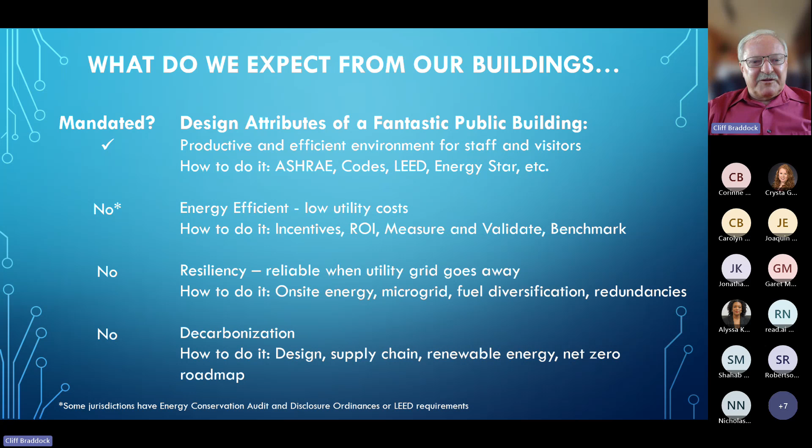All right, so let's take a look at life cycle. Just to be clear, does everybody know what life cycle is? I can still remember a long time ago somebody mentioned, do you know how to do life cycle cost studies? And I said, I don't even know what your question was, much less do I know how to answer it. So that is defined as the cost to the owner of a program over its full life, including the cost for the initial design, construction, subsequent annual costs for operations and maintenance and repairs and refurbishment of the building, and then the eventual demolition and recycling of the materials - life cycle cost.

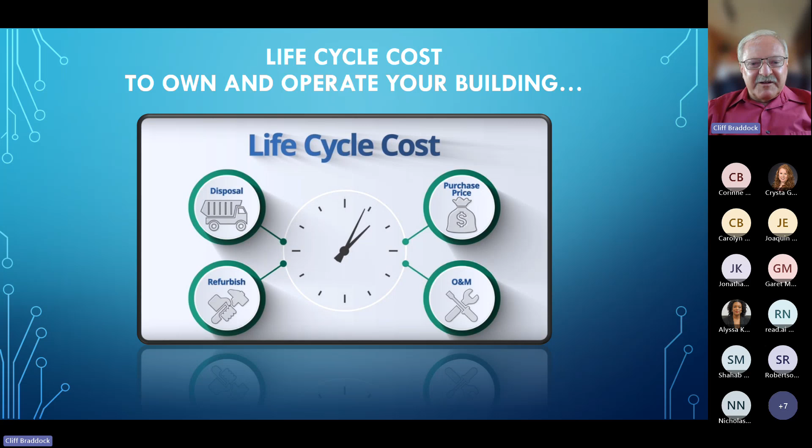So when you look at the life cycle cost of your facility, which area do you think is the most expensive? What areas do you have the most control over? Well, before we answer that about your building, let's look at some other industry of life cycle cost, and this may be helpful whenever you all go out and talk about life cycle cost on your building to other folks.

What does it cost to own and operate an automobile over its life expectancy? If you look at statistics, average cost of a car is 33,000. We put about 15,000 miles a year, we keep it 12 years. So where is the majority of the cost to own and operate that automobile? You have a lot of costs involved - the depreciation, the fuel for it, and then the ongoing maintenance. Sounds a little bit like a building to me.

So when it's all said and done, that initial cost is just a quarter of the overall life cycle cost of this automobile. You will spend $121,000 equivalent cost over the 12-year life of that typical automobile, which works out to 65 cents per mile. Did you all know that? I mean, your car is 65 cents per mile. Kind of what the IRS will allow for your depreciation, for your write-off on using your automobile. And the message here is that the initial cost was just a fraction of the overall life cycle cost.

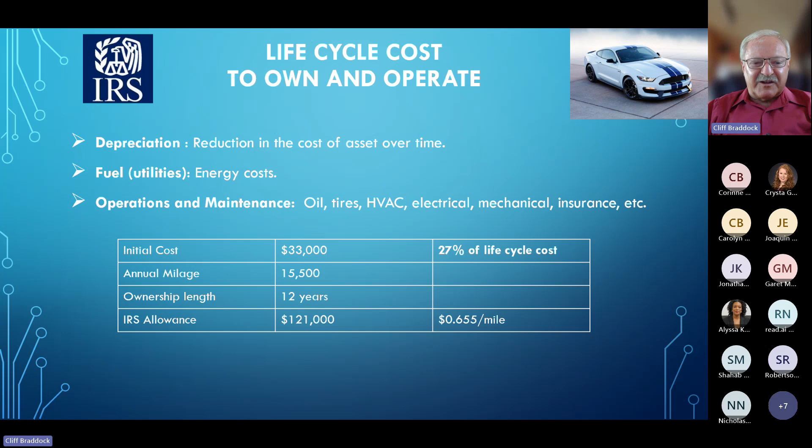So what's that got to do with the building? Guess what? The numbers are not way different. On a building,

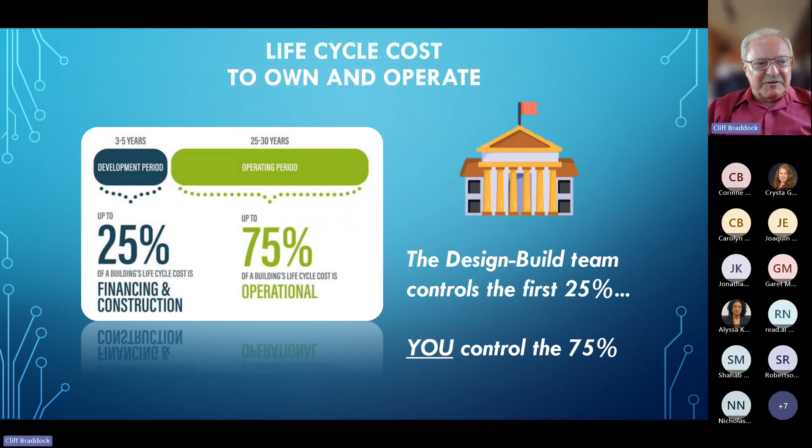there's some variability about this, but generally speaking, a quarter of the cost of the life of that building is embedded in the initial cost. That's the design and construction, and 75% of the life cycle cost of that building occurs over the 25 to 30-year life of that building. So it's not the builder, designer, and contractor that control the majority of the cost. It is you, the facilities operational staff. And that's what we need to hone in on with this webinar, addressing that long-term cost.

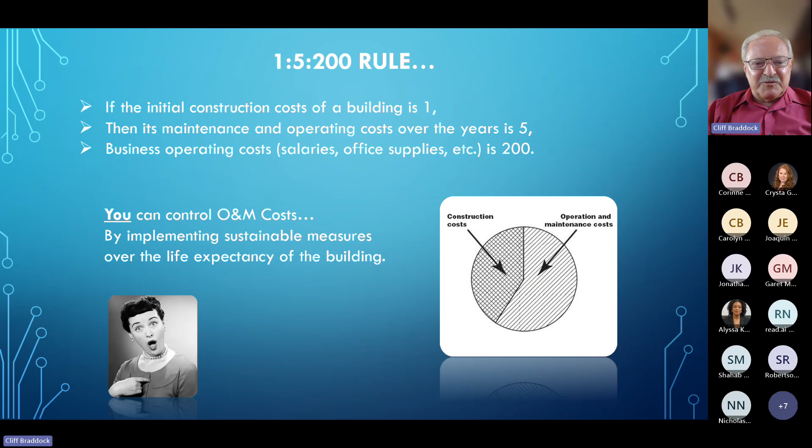So I think y'all are getting the message, but one more slide about those ratios. And I found this kind of interesting. I didn't realize you could go on Wikipedia and look at the 1-5-200 rule. But if the initial cost of a building is a 1, then the O&M cost is a 5. And just to be clear, the largest cost of operating a building is not really what we're discussing in this webinar. It's the salaries of the staff that work there. That is by far the number one cost. You may or may not have control over that. But it's that O&M cost that you do have control over. Yes, you, me. So like the photograph there.

All right, so where do you begin if you're going to take a look at these ongoing costs? I think it may help a little bit with some famous quotes. Some of y'all have probably heard this before, but it never hurts to remind ourselves that you cannot manage what you do not measure. So I have a controls background, and I know some of y'all tuned in here today also have that. You can't control something if you're not measuring it. You know that. So you're kind of shooting in the dark, and you don't really hit the target when you shoot in the dark. So you need to do some measurement.

So what do you want to measure? How about KPIs, key performance indicators? What is important to measure? The energy utilization index, the BTU per square foot, that would be something that's kind of an eye opener. That's a little bit like a scorecard on a test. And then the energy cost index, the dollars per square foot. If you're going to measure resiliency, there's a tier rating by the Uptime Institute that you can use. And there's also metrics reported to the PUC by your utility about the average duration of outages at your facility. And we're going to do a deep dive on decarbonization a little bit later, with more information about how you're going to measure your scope 1, 2, 3 emissions.

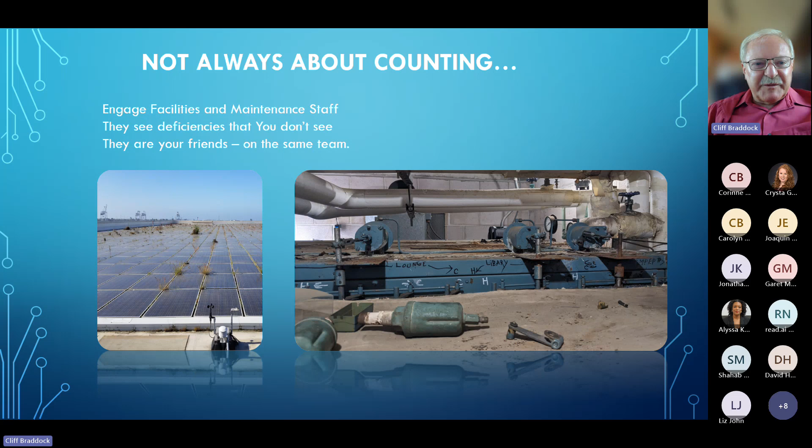So it's not always about counting the KPIs. Sometimes it's just common sense to go look around and let your eyes do some talking.

All right, well let's talk about a cycle now. You're going to see in this webinar that we're going to go all the way to decarbonization, and I'm introducing resiliency and energy efficiency. Have you really connected or realized that all of these are integrated? One feeds into the other.

We don't have enough time here today. I'm not asking us to have a debate or argument over this, but I'm going to suggest that the number one area to focus for any building is energy efficiency. So if you're looking at anything, resiliency, decarbonization, indoor air quality, or whatever your driver is, energy efficiency is paramount. Fortunately, that's a very mature industry, so you know what you need to do. You need to reduce your kilowatt hour usage, reduce your kW demand, try to address hot and cold spots inside the work space, and your goal is to reduce your cost for utilities.

And if you have no idea where your building stands, we need to get a KPI. So where is a good place to get a KPI for the energy efficiency of your building? The good news is your tax dollars have paid the EPA to create the Portfolio Manager program. You just need your own account, a password and an ID, and you're free to use a very valuable software tool for measuring the KPIs of your facility. You can get your EUI, your energy utilization index, your energy cost index, some emission indicators, and other great information from using Portfolio Manager to measure your energy efficiency.

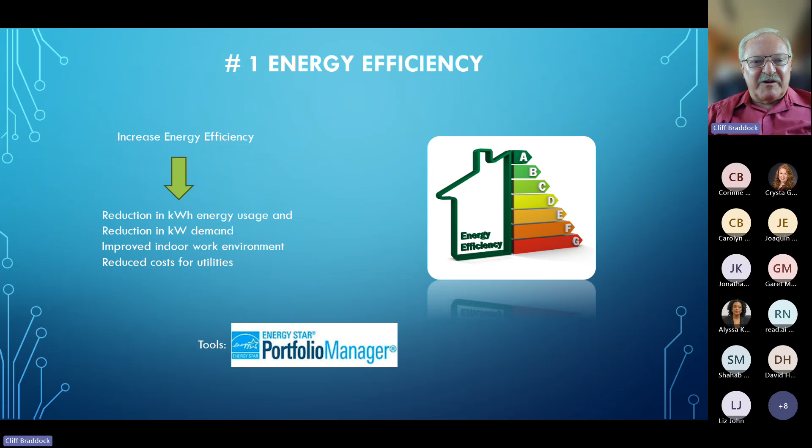So energy efficiency is a great thing because it can reduce your kW and your kilowatt hours. And what does that do for you outside of saving money? Well, if you're headed toward resiliency, how do you get a resilient building? We're working on resilience projects right now that consist of on-site production. You can use gas or propane and solar energy to produce power on site.

There's energy storage with batteries, and with all that properly connected, we can isolate from the grid and continue on with service without the grid.

Now, that solar and that generator and so forth, that stuff is expensive. You could say it has a big dollar amount on a per kW basis, cost per kW for a solar system. So how do you make that cost as low as possible? You want to have the system as small as you can get away with. And how do you get it small? Well, you need to do the number one thing first, which is efficiency. Reduce the kW demand and the energy consumption of your building, and now your cost to do the resiliency measures is going to be less than it would have had been otherwise.

Now then, let me introduce to you something some of y'all may not know about. So how are you going to measure your resiliency? That is, and I'm going to tell you that it's hard to do. It has to do with how much outage do you have every year? What are the disruptions that you have every year? And so how do you get a KPI on that? And I'm willing to share with this audience the outcome of what I'm getting ready to tell you.

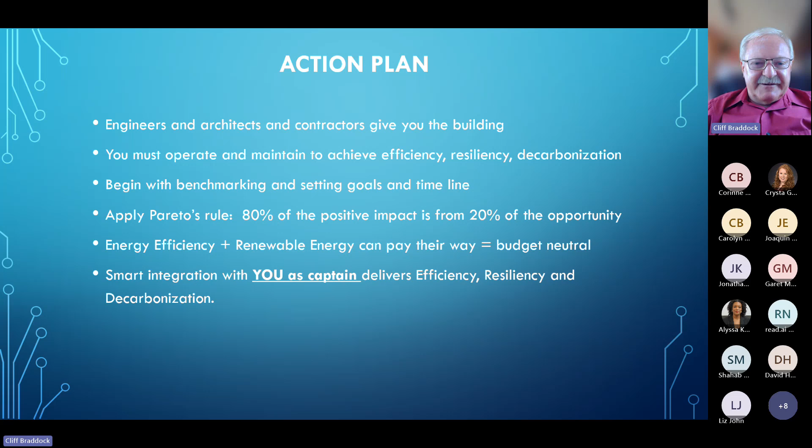So the idea here is smart integration with you as the captain. You can deliver these energy efficiency, resiliency, and decarbonization outcomes. I'm trying to set the pace here for our webinar, and I think that's kind of my messaging. We can do a deep dive on anything and everything, these concepts that we're throwing out there, so we want to continue that discussion. Corinne, I'm done here for right now.

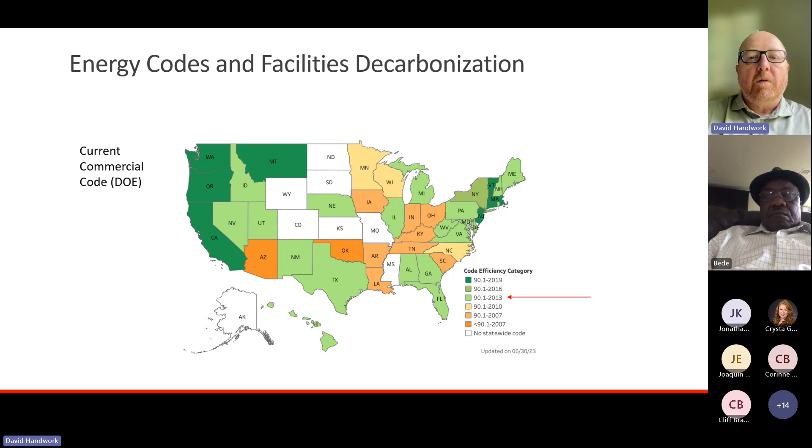When you look at 90.1, the current version is 2013, where you saw on the previous slide that Texas kind of leads the bordering states with the most current version. Texas is parallel with New Mexico, but certainly leads with the most current version. The current published version of 90.1 is the 2022 version, and 2025 will be published shortly.

So when you look at Texas, you've got the most current versions there. I know all states are reviewing the most current versions, 2022 and 2021, mainly because of the grants coming out with the Inflation Reduction Act and the other stimulus bills. They add enforcement of the most current versions, and are also adding incentives for states, municipalities, and other jurisdictions having authority to bring up the most current version.

There will be more dollars coming out to really perpetuate the most current version, so there's not a lag and delay. You saw on those previous slides, some states are more than a decade behind with the most current version, so that's kind of lagging the energy efficiency driven by codes and standards. You see federal agencies really jumping up and taking the most current version, but there are still some giant leaps. This slide may be a little difficult to read.

This was published in 2020, showing a progress report particularly of 90.1, of how to get to net carbon zero emissions. You'll see some dotted lines of advanced measures, rooftop solar offset. They were saying that in order to get there, the line is moving too slow with the 2019 version, and that you're going to have to bring in more advanced measures. That was true with IECC as well.

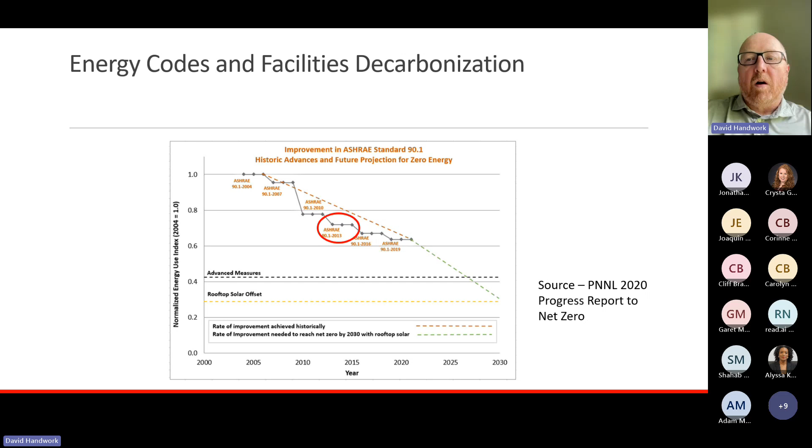So here with Texas, relative to the 2004 version of 90.1, you're only about 70% to net carbon zero based off of a code. IECC had a lot flatter curve, so they have more challenges to get net zero energy efficiency, and you can see the 2018 version there for Texas.

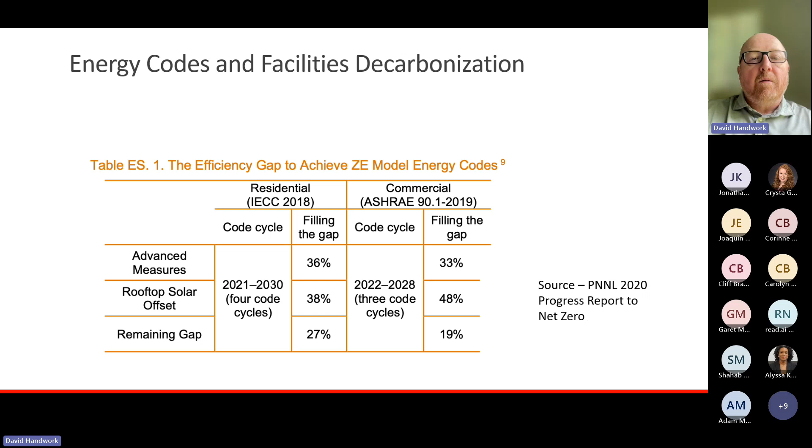Excuse me, I need to back up here, where IECC saw the gap, they changed their publication cycle from a model energy code to a standard. There was a series of challenges to proposals during the adoption process, so they said, let's change how we do our process.

There were multiple stakeholders in the ICC plan to get to carbon zero that said let's get this moved to a different type of review for IECC, so that we can do what they call a glide path to net zero emissions. So both IECC and 90.1 have a plan for the next 3 code cycles, which falls in the early 2030s for both codes to be net zero emission standards and codes.

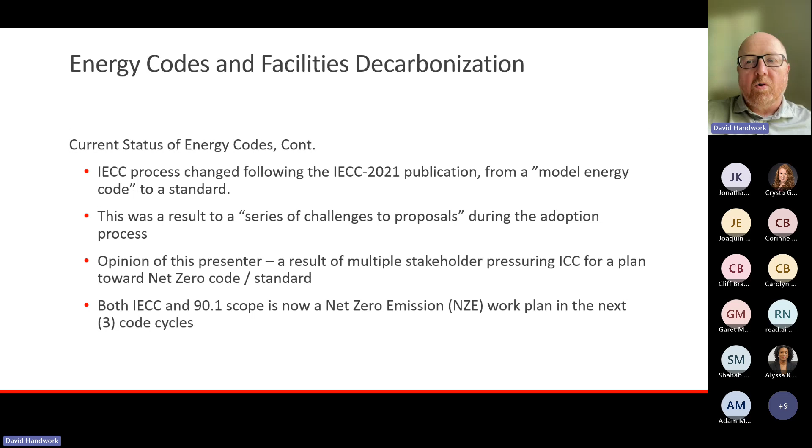Now you'll see the adoption cycle lags, so it may not impact the municipalities and states in their code adoption cycle until the late 2030s, unless you're a public agency and federal funding requires you to be the most current version, then you're going to have to adopt this. So what does that basically mean?

Both standards are going to have advanced measures for all your plug load controls. Right now 90.1 and IECC have occupancy sensors tied to some of that, but you're going to see more elevated management of that and some unregulated scope. You're also going to have advanced envelopes that's going to be prescribed, and there's already in 90.1 an HVAC system performance calculation that's going to be increasing so your holistic system has certain levels of performance that's going to be prescribed.

They're all going to require some level of electrification of your facility systems, getting away from carbon-based fuels like natural gas or propane. You're going to see more heating requirements with electricity or heat pumps. If you've got a chiller system, heat pump chillers have been around for a while, so that may be an option. How do you deal with process heating? That won't be regulated in the short term, but you can see it probably coming.

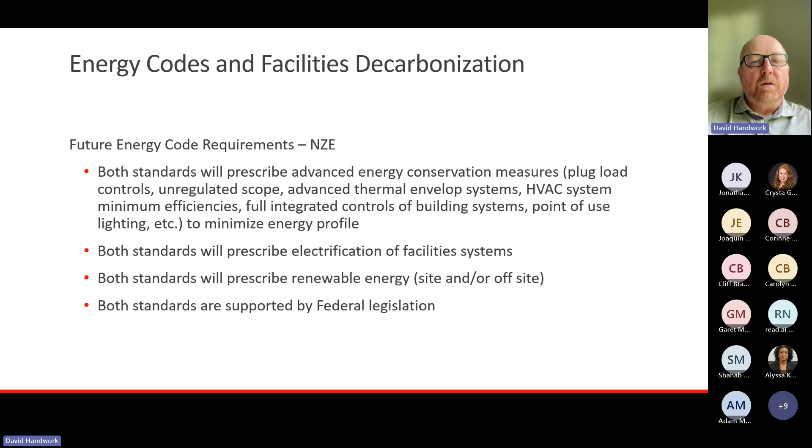The whole purpose is to get net zero emissions, so you're trying to eliminate as much carbon-based energy from your facilities relative to codes as possible. They're already requiring some level of prescribed renewables, and that may be in the current version, so it may not apply to all facilities. But you're going to see, eventually to get to net zero emissions, the prescription of renewables—either site or offsite—be required as part of new construction and major renovation. Most of these standards are supported by federal legislation.

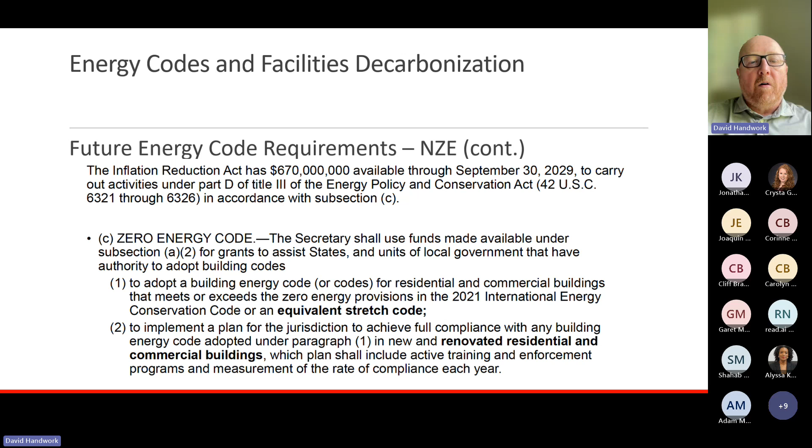Here's some examples. You had the Inflation Reduction Act, which had funding for really having zero energy codes. I won't go through all the details—I'm just showing this as an example. This was part of the IRA. So this is what they're trying to get to, at least in 90.1.

As you go through the code cycle to the 2031 version, you're going to get to where your energy efficiency is 0.35 relative to the 2004 version, and the renewable offsets at the bottom of the graph will step up as you go forward in the code cycle to get to net zero emission. I think I have a slide showing where we're at with ASHRAE in Texas. You can see, even coming up to the most current code cycle in 2031, there's a lot of steps that have to happen. Even getting to the most current version is a lot of steps.

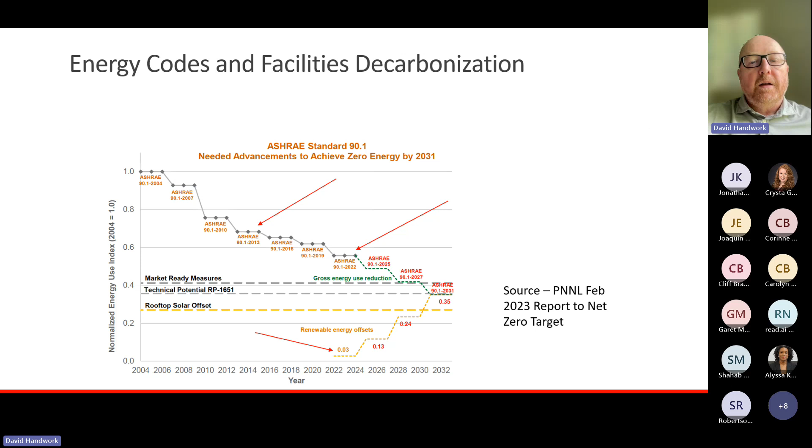Now you have 0.03 in renewable energy offsets, and that's going to step up to 0.35. So you can imagine what that's going to do for costs. But here's the kind of trick question: will Texas, and will municipalities within Texas, adopt this code? There's already pushback right now because of certain factors—some of it's political, some of it is driven more by the fact that construction costs are going to go up. That can be called political, but it's also definitely true when you're dealing with certain construction types, especially multifamily housing, where it increases costs.

You're seeing states like North Carolina put a moratorium on freezing the IECC, because of the multifamily housing costs they found in their cost analysis. There's also Colorado, which is going the other way and saying they're going to mandate energy performance, despite the criticism. In the state of Texas, Governor Abbott, in the last year, vetoed part of the energy efficiency bill. There's a lot of reasons for that, but the point is there's not full adoption across all states of these bills. Here are some more examples—I'm just rolling through real quick.

Very interesting—St. Louis had a residential energy code update, but the state of Missouri overrode that and said no, you're not going to do that.

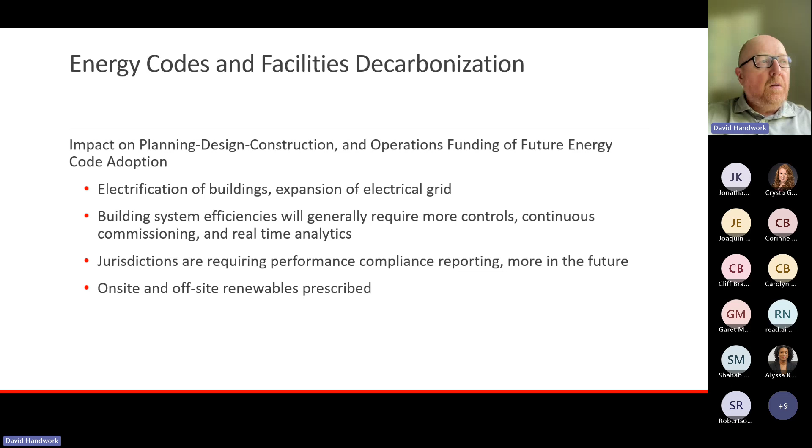And then we're going to figure out how to deal with on-site and off-site renewables. Texas has land available, but other states aren't going to have that luxury. So how do you deal with that?

Other impacts on the design: first, construction costs. I was director of planning, design, and construction, so I have some basis for this, but I'm just guesstimating that we're probably going to see a 10 to 20% increase in first construction costs with the adoption of the most aggressive codes in 2031.

Total cost of ownership may or may not increase when you look at energy savings and other factors, but that remains to be seen. Operating costs should decrease, but again, I've already talked about the technicians issue. Compliance failures could result in penalties and fines. Public universities may have federal dollars tied to research, or even Pell Grants restricted, reduced, or eliminated if they're not meeting some of these codes in the future.

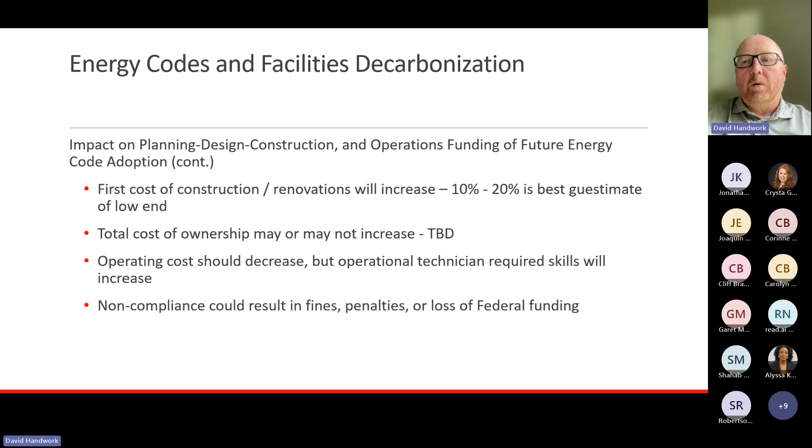So what do we need to do? We're already decarbonizing new buildings via code, but we've got existing buildings—how do we deal with that? Going forward, you may not be doing a major renovation where codes and standards apply, but there's still a pathway to reach decarbonization, whether prescriptively via code mandates or voluntarily.

For existing buildings, the actions we're taking are virtually non-existent, because it's all driven by economics, or by an entity committed to decarbonizing their facilities. It's very difficult because it's a slow process. If you look at the CBECS database, most buildings were constructed prior to 2010, with very limited DDC controls or other features, which makes it very difficult to decarbonize.

We've all probably heard the statistic that buildings in the United States, and even the world, consume about 40% of energy—I pulled that data from the CBECS database. But there are also common barriers: general capital funding, how do we replace fossil fuel systems, and the fact that we just don't have the technology leap yet to really get where we need to go.

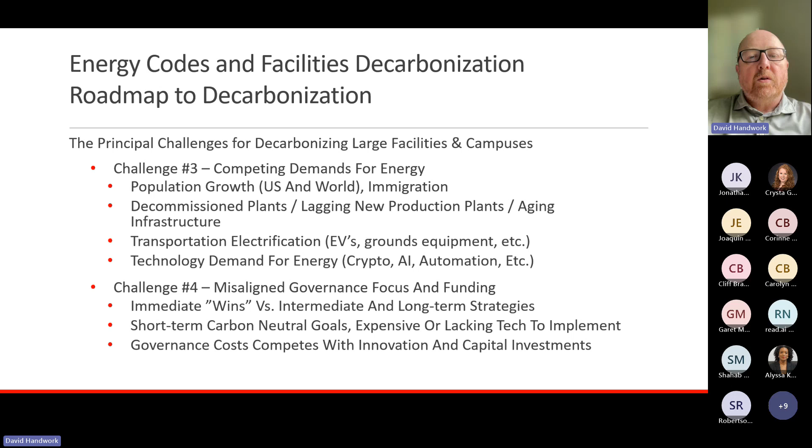We also have misaligned governance funding. Politicians like to go for quick wins and aren't rewarded for long-term vision, because if they pursue that, they're often voted out before it comes to fruition. Some of that needs to change—we need more long-term goals instead of short-term wins.

So how do we do this for existing facilities? It's pretty easy: you just need to go do aggressive energy optimization right now. That usually has a very quick ROI. Some activities aren't even tied to occupant behavior—with technologies available today, you can implement retrofits on existing buildings and get an ROI of 24 months or less in some cases. You need to look at your occupancy, because a lot of times the best energy conservation is simply turning things off.

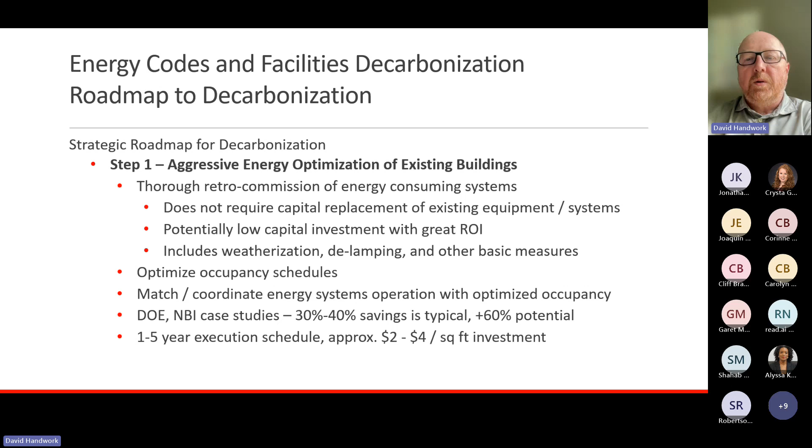If there's nobody in the building and there's no reason to run your systems for data centers or other types of requirements, turn the systems off. You match and coordinate these systems operations with optimized occupancy of the buildings. DOE and the New Buildings Institute had studies showing there's potentially 30 to 40% savings in these type of step one scenarios.

So it's quick payback, usually investment $2 to $4 a square foot. Step two, once you get past that, when we came out of COVID, this is more related to commercial real estate and even higher education where students are doing more remote learning. Our spatialization is much, much lower. I've seen numbers in other parts of the country where commercial real estate utilization is down as much as 50%. In Texas it probably varies - in North Texas, utilization is pretty high because there's high demand.

But even with high demand and high utilization, you have to have a top-down type of approach where you're committed, because everybody wants to own their space, and we tend to use more space than what we really need. So you've got to really deactivate these unused spaces and put safety backstops in there so you don't have unconditioned space that creates other challenges and other liabilities.

And then you expand those energy optimizations with optimized spatialization. This is a very hard nut to crack because of the ownership of space and giving that up, and having full control of unoccupied spaces. But payback is usually pretty quick, and cost is pretty low - 25 cents to 50 cents a square foot. If you do it with step one, it makes the ROI come down a lot faster.

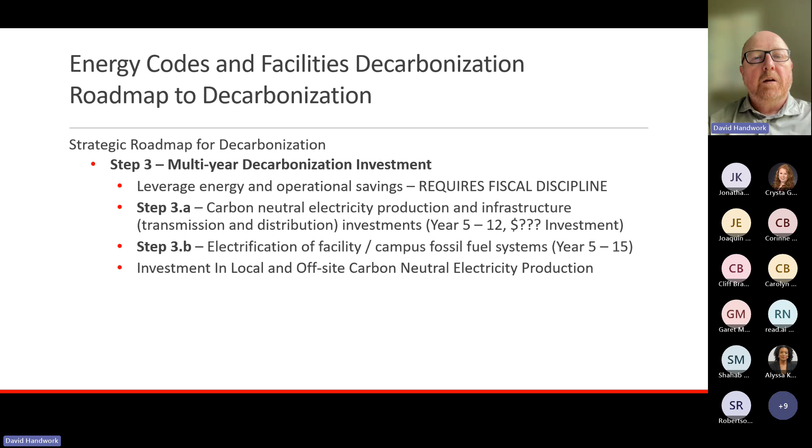This may take 10 years to implement, but you have to be disciplined and follow these plans. Once you get through, say, 5 to 15 years of steps 1, 2, and 3, then you can start looking into the future and technologies that are coming forward. You really want to reduce with those steps 1, 2, and 3 to get your EUI, your energy use index, down to, on a basic commercial facility, less than 30,000 BTUs per square foot a year.

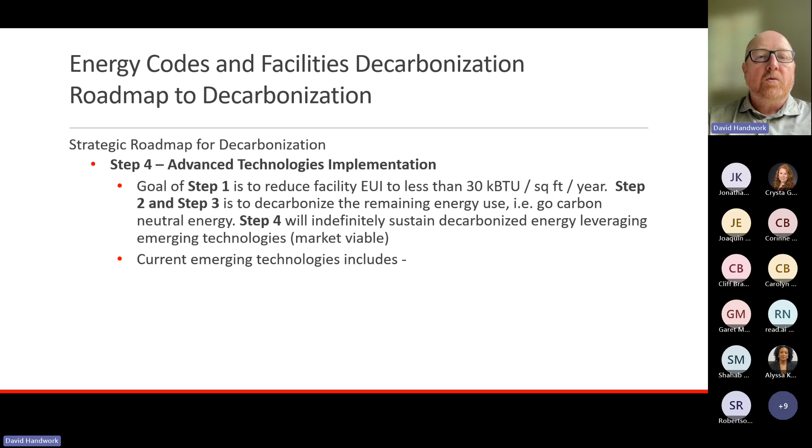Then you can start putting these other factors in, and it makes sense to right-size your renewables. I agree with the prior speaker that solar now has a cost justification. If you own your land, it's easier; if you have to go get more land, it may get more difficult. But you can get into newer technologies that are available today and will advance in the future - they're going to include a lot of these different types on the edge and also market-available.

As we get into energy storage, it's going to make renewables more viable. The thing I'm watching right now is long duration storage, and I think that's going to advance in the next 5 years - we're going to see a lot of that, and a lot of these other really interesting technologies.

Continuous air purification is already in some markets - why ventilate a building if you can purify the air and make the IAQ better than bringing in outside air? I'm not saying eliminate outside air, I'm just saying minimize it so that you can get good IAQ.

And all these different artificial intelligence tools will be a game changer, but it's not yet. It can do generative AI, but when it can start doing mathematical functions, then we can start applying that to energy optimization and planning.

Things that are like super insulation, OLED film lighting, where your whole ceiling is a light. OLEDs have been around, they're on our phones. But there's a lot of testing in the emerging market. They're very low power, high efficacy.

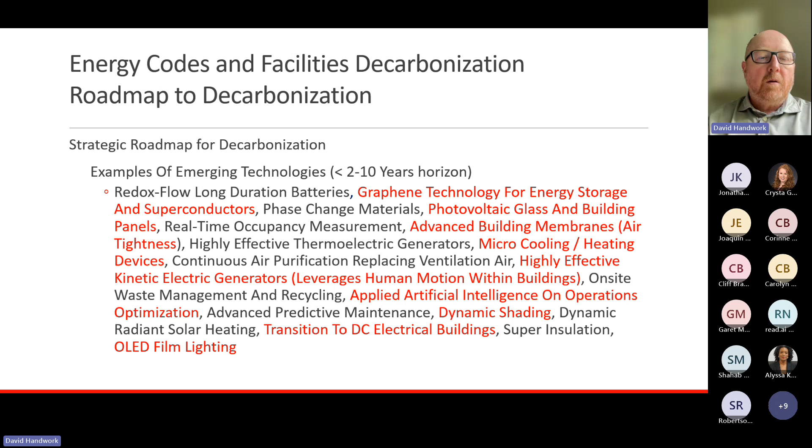The things like that are going to change when we can get to net zero emissions pretty quickly. Will we get it as an economy by 2035, 2040? I don't think we will. Do we need to be totally carbon neutral? That depends. But we need to work and strive to be a net zero emission economy, but also a net energy independent economy, so we can lead the world with decarbonization and energy independence, with less dependence in the global market relative to efficiency and decarbonization.

So with that, I'm going to turn it back to you, Corinne.

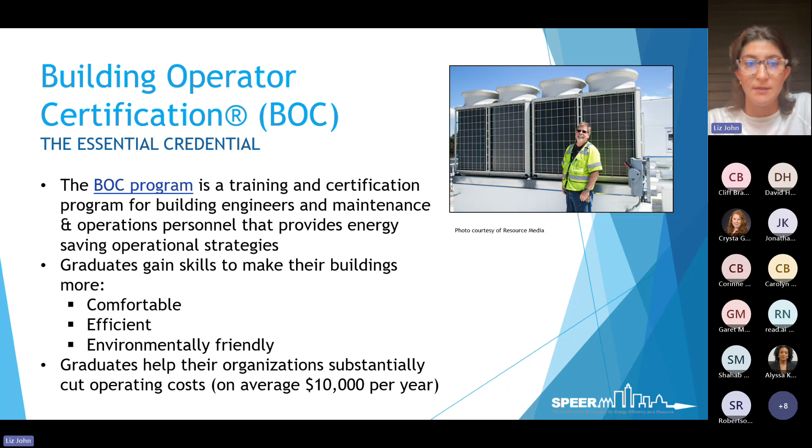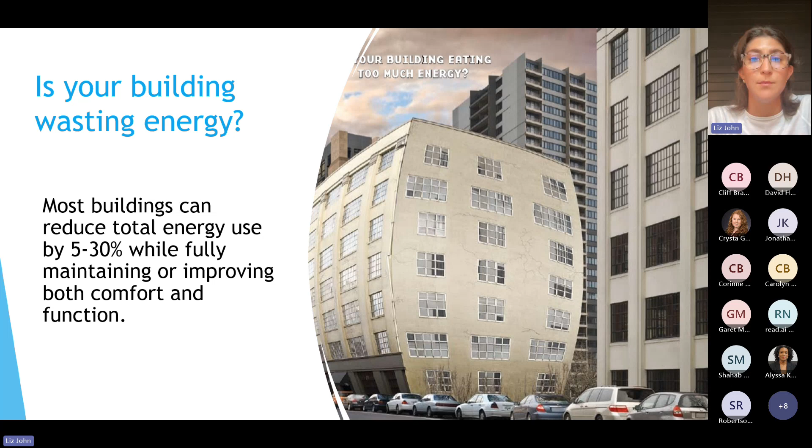So how do you know if your building is running efficiently? Many have room for improvement, and energy problems can lead to comfort problems. Many buildings can reduce energy use by 5 to 30% while improving comfort in these buildings.

So let's talk about the energy savings for BOC. BOC is one of the only training programs with third-party evaluators. Sometimes facility departments are seen as a resource center for using energy and staff, so anything we can do to save money and energy going into that department is largely helpful.

Up to 12 to 13 states accept energy savings from the BOC, and all of the savings reports are on the National BOC website. They also include water and gas as well.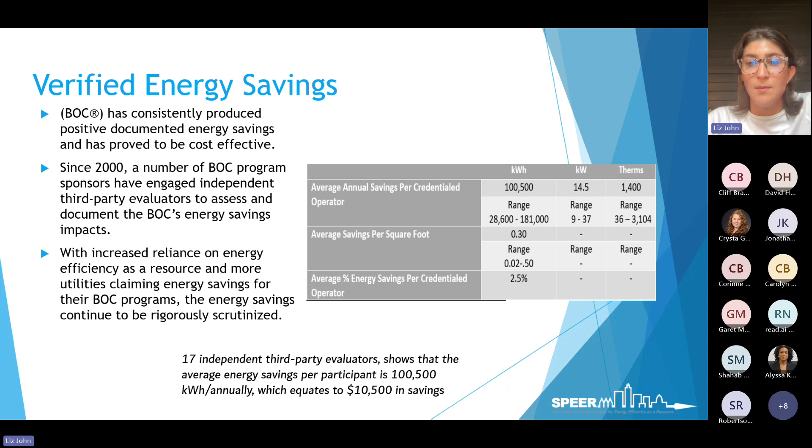Let's touch on the benefits beyond just energy and money savings. These facility managers increase job safety with the knowledge that they gain. They will improve productivity, equipment lifespan, and building performance. You improve your indoor air quality, occupant health, and it reduces turnover. You have well-trained technician staff and operators who can make decisions quickly, and they feel more empowered to do so.

Fundamentals is for folks who are maybe interested in getting into building management and don't have a base level of knowledge. It covers building system basics, the fundamentals of indoor environmental quality, and you don't have to have any prerequisites to enter into that. Level 1, we do encourage students to have either 2 years of experience under their belt or have taken some education prior to this. It's a little bit more in depth than fundamentals.

They touch on HVAC controls, a full building scope. Students take what they learn in class and apply it to a hands-on project in their facilities, really just to engage them and make sure that they are able to put into action what they are learning in the classroom.

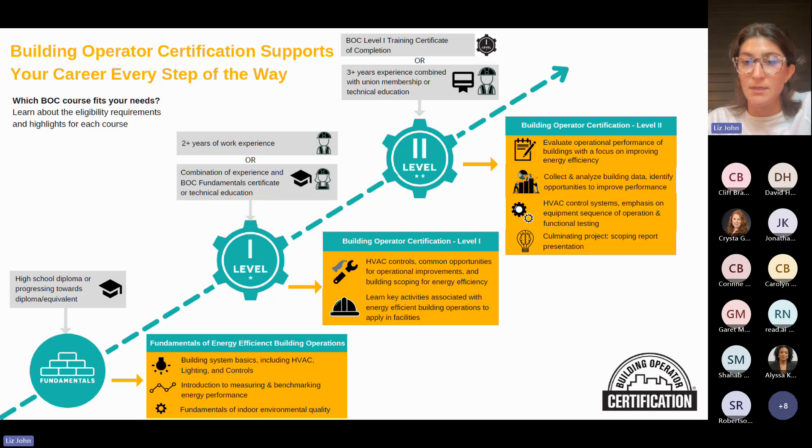But I'd like to go deeper into level 1, and this is really what SPEER focuses on the most in our territory. Level 1 covers, the students will get 7 course books that they get to take home: energy efficiency operations for HVAC, measuring energy performance.

This is a big benchmarking of your building, right? You can't measure what you don't know. So we teach these students how to use Energy Star benchmarking and the importance of it. Lighting fundamentals, HVAC control fundamentals. There is a large amount of folks who don't have access or don't even know how to read their commercial buildings' utilities and utility bills. So we're really teaching them how to get in and the basics of operating these mechanics and how to read these utility bills once they start improving their buildings.

And I will touch on the five projects to follow, and I don't really need to cover level 2. But again, it's a full scoping of building operational improvements. There's a bit more of a deeper dive into water efficiency, and then there's that peer exchange project that I mentioned earlier.

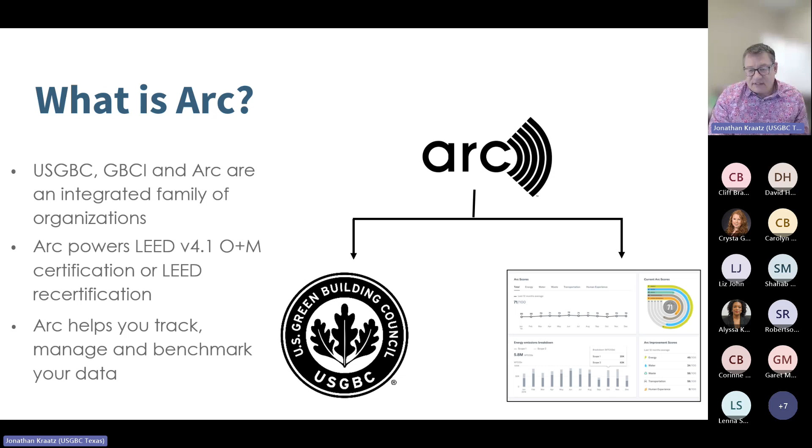So really, ARC tracks performance of buildings and other spaces, looking at energy and emissions, water, waste, transportation, as well as human experience. So it takes the metrics and the KPIs from Portfolio Manager and expands upon them and actually goes deeper.

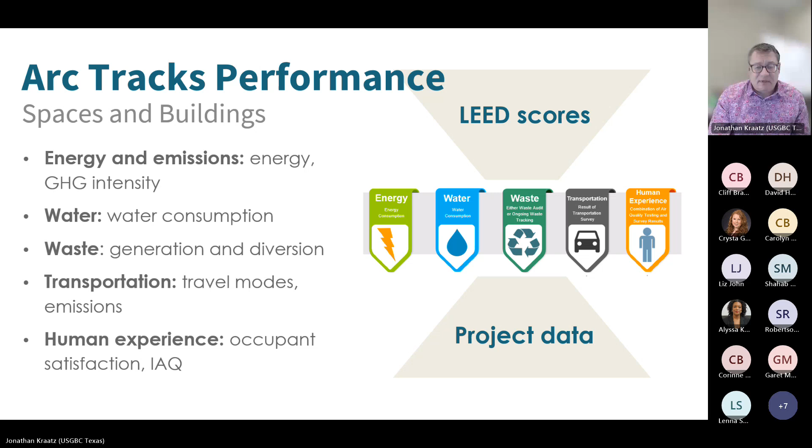To do this, we definitely did not do this alone. There are more than 25 active partners who are contributing to its development, looking at groups like Moody's and others, especially when you get to climate risk analysis.

There's a lot of outside information that is brought into this. Here's a representation of some of the folks involved with this, including Portfolio Manager - it plays a key role in this.

So what does ARC actually do? There's a score - it scores any project anywhere at no cost. I will emphasize the 'at no cost' portion of this. It gives you a benchmark that compares projects to its peers using performance standards as well as custom created targets for individual owners or managers. And it allows you to communicate and analyze this information in ways that are easy to digest and understand.

Who is using ARC? Primarily facility managers, corporate sustainability, property management companies, higher education. And that's not just in Texas, not just in the US, but globally.

This system has been used going back - it's about 10 years old now. So by the numbers, we're looking at more than 20,000 active users, more than 10 billion square feet. Actually, that's an old number - it's closer to 15 billion square feet at this point, in more than 140 countries.

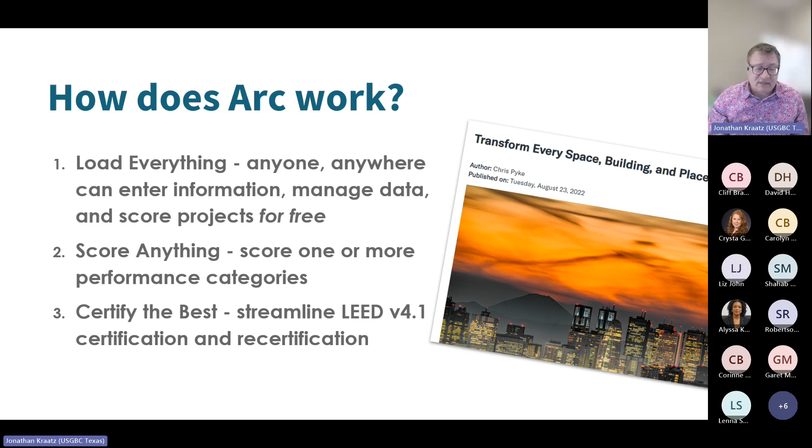This allows you to score to see where your properties are with regard to each of the assets you have that would be performing in different categories, looking at where they would fall if they were certified or if they were submitted for certification.

There are also ways through ARC to earn recognition without going through a full LEED certification. You can do certifications for energy, water, waste, transportation, and also the human experience piece - how the people are interacting with the building and what their experience is around that.

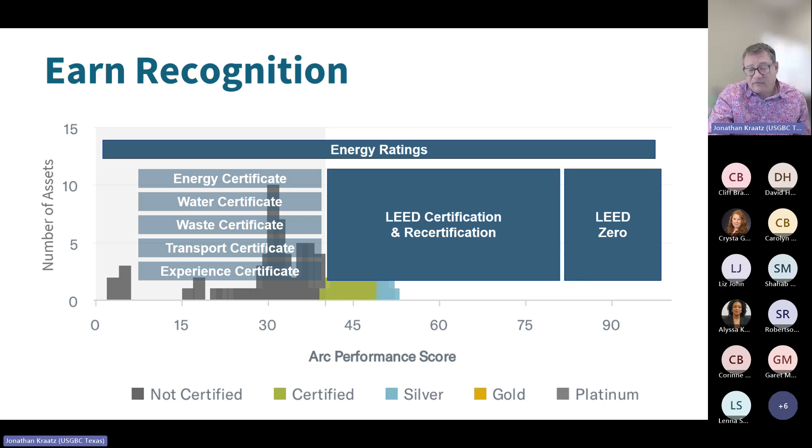It does also allow for LEED certification or recertification, as well as stepping up to a LEED Zero certification, which are available for energy, water, waste, and carbon.

ARC also supports other reporting processes, looking at GRESB, the Global Real Estate Sustainability Benchmark. For building operations certifications, it incorporates energy ratings, risk assessment, waste management, employee health and wellness, tenant satisfaction, tenant engagement, as well as portfolio targets.

I'll look at the portfolio piece again in a moment for those owners with more than one building. Again, benchmarking and building performance standards are key to us transforming what our building market is and reaching the carbon and emission targets we have set individually and as larger entities as well.

ARC also allows you to put in custom targets, like if you have set your own corporate or city level targets for different performance metrics. You can put those in and measure against where you have set those targets - are you actually reaching those goals?

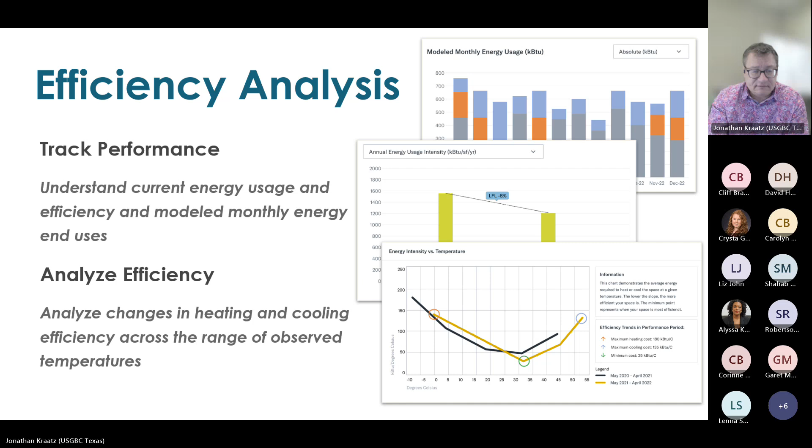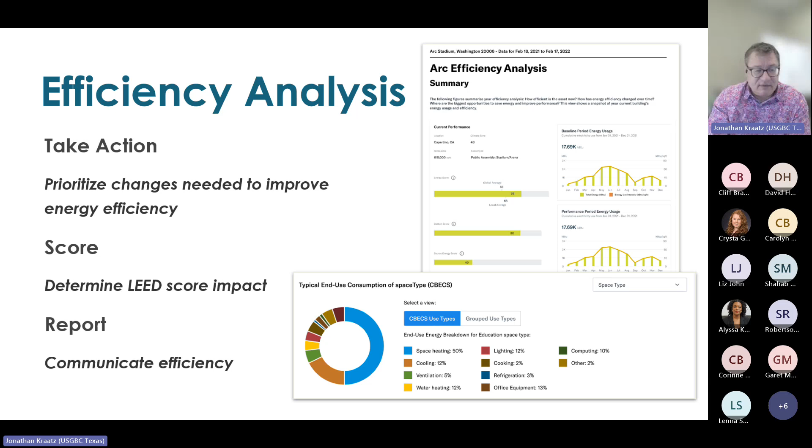You can also put in variables within this to show if we made certain changes, what the projected outcomes would be. These are projected outcomes, but it does also allow you to look at where you are performance-wise, what your scores would be looking within a LEED framework, as well as to communicate what the efficiency would be where you are, as well as what it would be with certain changes that you have modeled within this.

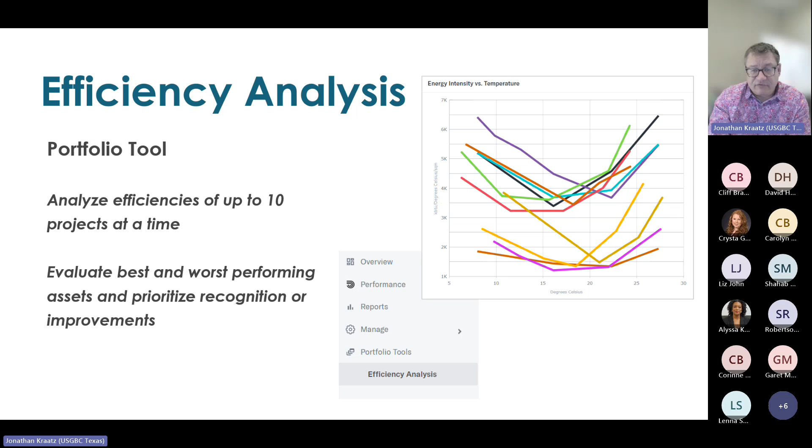Again, allowing you to track up to 10 projects at a time and show where they're performing relative to one another, as well as themselves over time.

Green building and EU taxonomy - this also helps crossover for anyone who is doing international reporting, particularly with European crossovers. It helps with matching the apples to apples and oranges to oranges within this. It helps you make sure you have all of the pieces aligned and collected properly for that.

This allows you to go by project type, input your information, look at what your objectives are, and then look at what the safeguards are and those pieces within the protocols that you are establishing for your projects.

ARC does also allow you to download your scores, download the reports, and also look at climate risk. These are pieces that are actually done. The climate risk analysis is actually done through Moody's and allows you to look at different levels or different threats.

With resilience, primarily, as a number of speakers before have talked about, resilience isn't only energy reliability. Resilience is also related to heat, flooding, and other weather issues. Our folks down in Houston have had a few issues in the past few months with flooding, hurricanes, and otherwise that are definitely risk factors for folks here in Texas particularly.

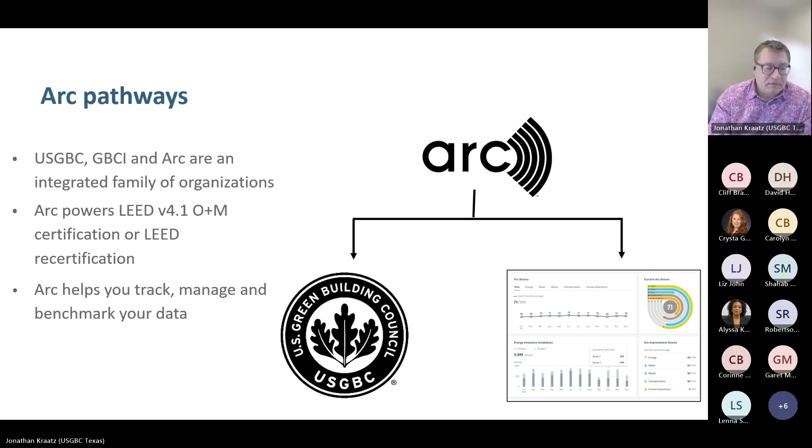Again, I mentioned the portfolio tools. This allows you to track not just one building, but all of your buildings individually and as a whole, to see where you are. Basically, looking at each individual project, each individual facility, to see where it scores and how it's doing for energy, water, waste, transportation, and the human experience for that.

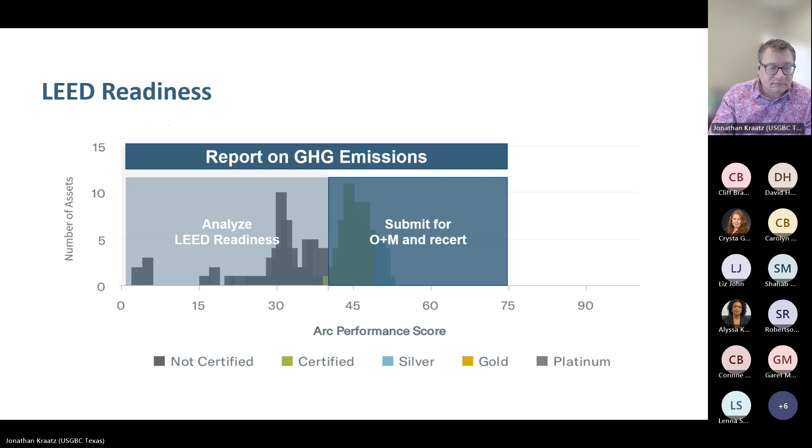Again, those are the same slides from before. Okay, I left something here that I thought I took out.

So basically, if you want to get started with this, let me know. As Cliff mentioned, with Portfolio Manager, it is a free account and allows you to load all your information in, see where you score, see where it scores against a facility, scores against its peers, or as your portfolio scores against itself. And then if you want to pursue further certification with LEED or Energy Star or others, it will give you the operation for that.

I know that David was mentioning the code cycle. LEED also is on an update cycle where you've got a 3 and a 4-year cycle for IECC and ASHRAE 90.1. LEED version 5 is moving into a 5-year cycle.

Looking at the background on where LEED is, it is a market-based rating system, but it is shifting a bit this time, looking more towards near zero carbon, as well as adding equity and resilience, and promoting wise use and safe utilization of all resources. So the next version will actually focus a bit more specifically on decarbonization, ecosystem conservation, as well as the human impact and human experience.

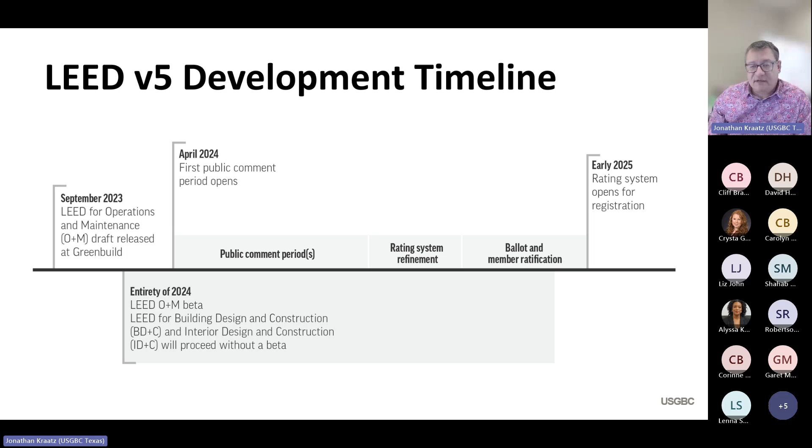As I mentioned, the impact areas are ecological conservation and restoration, quality of life, and decarbonization. It's a major shuffle of how the LEED rating system has been arranged and utilized over the past 25 years. So this is a significant shift for this update.

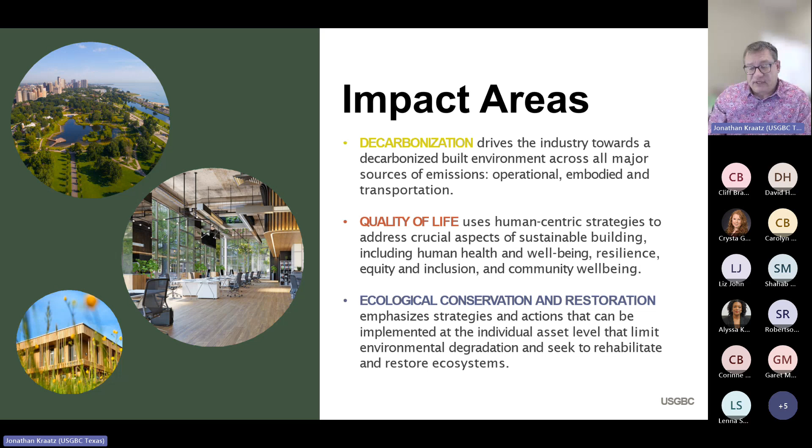Decarbonization, we've talked a lot about that already, looking at operational carbon, embodied carbon, as well as transportation being calculated in that. Quality of life: these buildings we're doing have impacts on people, looking at those crucial aspects of sustainable building that include human health and well-being, resilience, equity and inclusion, as well as how buildings and projects affect the community as a whole. Ecological conservation and restoration emphasizes strategies and actions that can be implemented at the individual level to limit the impact we're having on our environment, or to actually rehabilitate or restore ecosystems where possible.

This is a flexible system that does give options. There is not a singular prescription anywhere. No two projects are the same, as everyone knows, so there are different changes in that. There are also some point thresholds that have been raised. There are also references to other standards for being above code. The base standards do shift as those codes are updated.

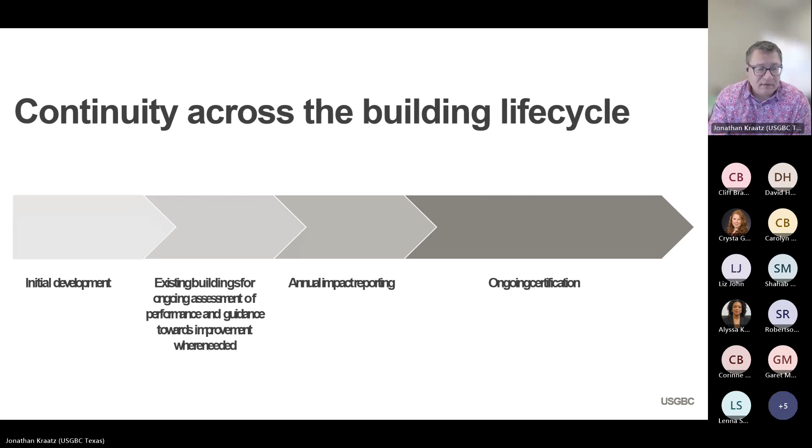Again, the operation and maintenance portion of LEED is positioning every building on a path to improve performance while maintaining the pursuit of market transformation and leadership.

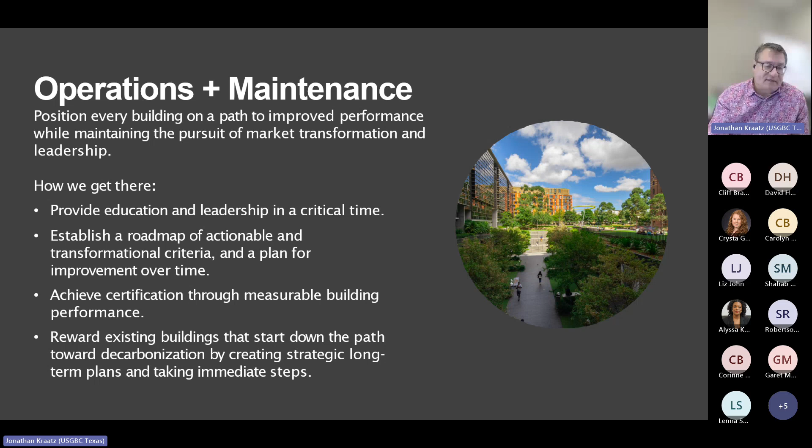What we're doing is providing education and leadership, establishing a roadmap for actionable transformation criteria, looking for buildings to achieve certification through measurable building performance, as well as rewarding buildings that start down the path toward decarbonization by creating strategic long-term plans and implementing immediate steps within that.

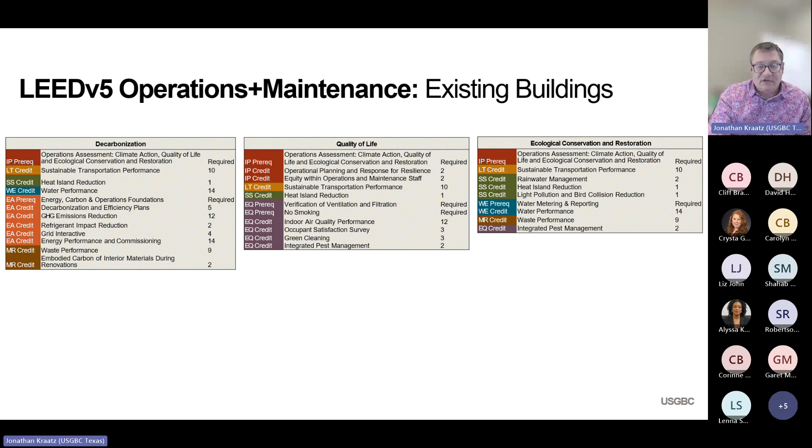This is the reshuffle of where the credits have been in the old system: integrated process, location and transportation, sustainable sites, water efficiency, energy and atmosphere, materials and resources, indoor environmental quality, and project priorities and innovation. Those same credits are here, but they're shifting, moved over into decarbonization, quality of life, and ecological conservation and restoration.